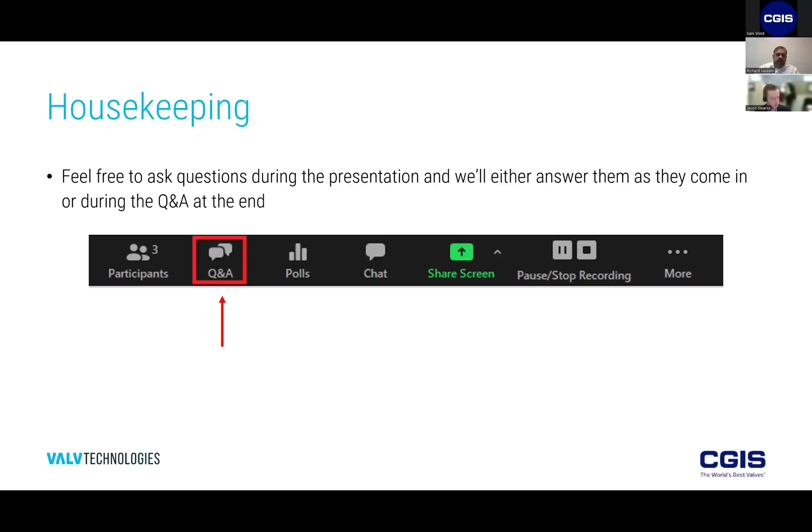So quickly as well, I just want to talk a little bit about CGIS, who we are, and our relationship with ValvTechnologies. Some of you may have worked with us in the past with other webinars and so forth. But just quickly with the background of CGIS, we're a valve automation company, and we really look at solving valve problems.

We do that by approaching the application. So we take an application-based approach and look at what the process conditions for that application are, what the valve's job is. Is it isolating or is it controlling? And how well does it need to do that job? Through partnering with companies and manufacturers like ValvTechnologies, who we've been working with 25 plus years, we're able to come up with solutions that solve the problem the first time and give you the performance, service life, and cost of ownership that you expect out of your valves. And we are happy to do that all day, every day.

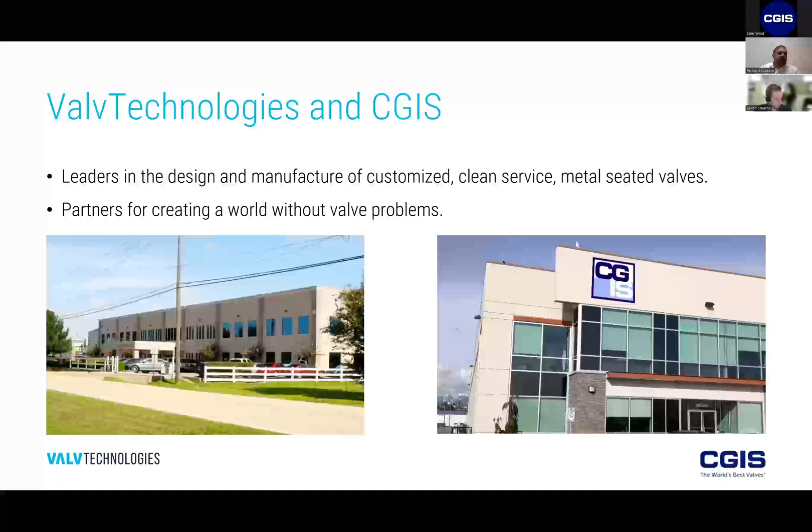So the whole series is about hydrogen as a fuel for the future. And the way that we're going to do this webinar is we're going to talk a little bit about the general principles surrounding hydrogen, and then we'll look at valve design in the second half of the webinar.

But the first place to start is actually our own sun. Our sun is mostly hydrogen, about 90% and certainly over. There's two reactions that occur, nuclear fusion and nuclear fission. The sun actually operates by fusion. So we're basically taking hydrogen and turning it into helium, fusing the two aspects of hydrogen, and then we actually get energy as a consequence out of that.

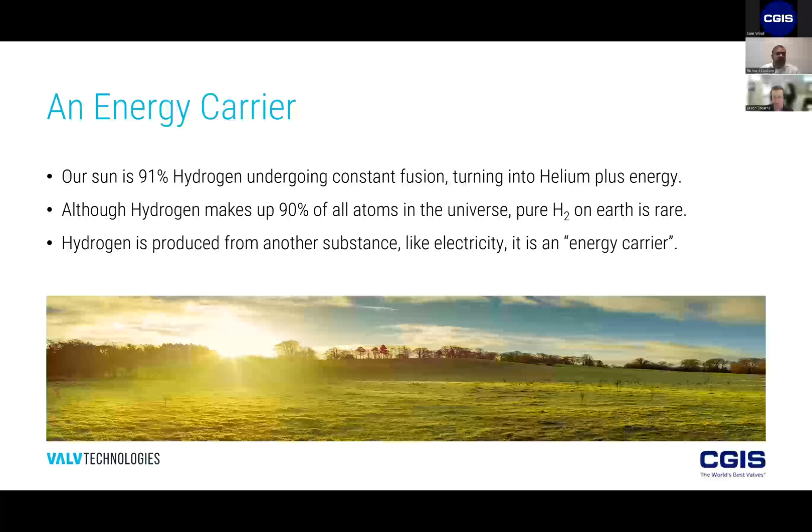Hydrogen makes up roughly 90% of all the elements or atoms in the universe. So at first you might think it is relatively abundant. In reality, on Earth, it's actually pretty rare to find. So the only way that we can produce hydrogen is we have to find it from another substance. Just like electricity, we see it as an energy carrier, and we'll go through some of the hydrogen production methods to actually get us there.

When we look at all the topics around decarbonization and we think about why hydrogen, when there are other ways in which this could be accomplished.

If we take the United States, for example, around 5% of the landmass would be covered with solar panels or wind turbines to generate all of the electricity that is consumed in the United States. So that 5% of landmass is infeasible to do. It would be a huge amount of cost, and lots of infrastructural developments would have to take place.

So although wind and solar will continue to be growing areas of renewable energy, we have to look at other methods as well. Hydrogen, as I said earlier, is relatively abundant in the universe, but on Earth it's relatively rare. So what we do is we produce it from a feedstock, and that feedstock is either a hydrocarbon, so hydrogen and carbon, or it could be just water itself.

If we do generate hydrogen from hydrocarbons, the downside of that is it creates carbon dioxide. And of course, with all the decarbonization efforts, it doesn't seem to make sense to have a clean fuel, but in a reforming process, we have this byproduct of carbon dioxide.

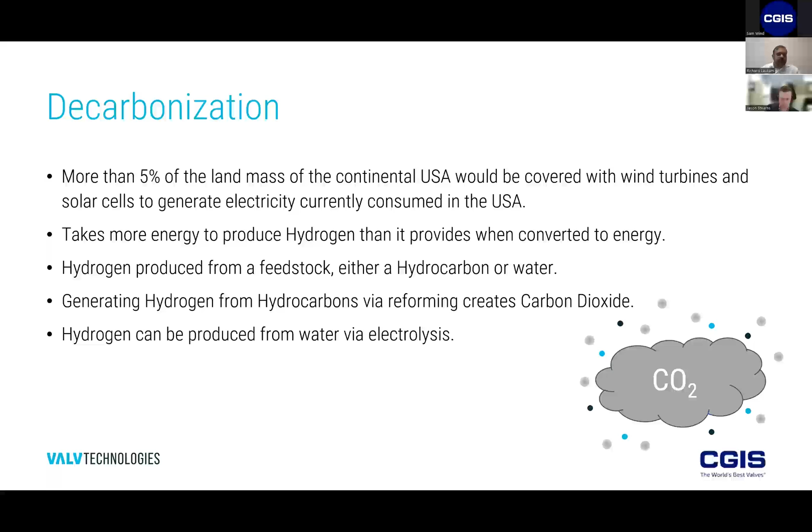So currently we're about 80 million metric tons per year, but we can see that rising to about 180 by the year 2030. So currently very little of it is for fuel, but the future potential for it being used as a fuel is still quite there.

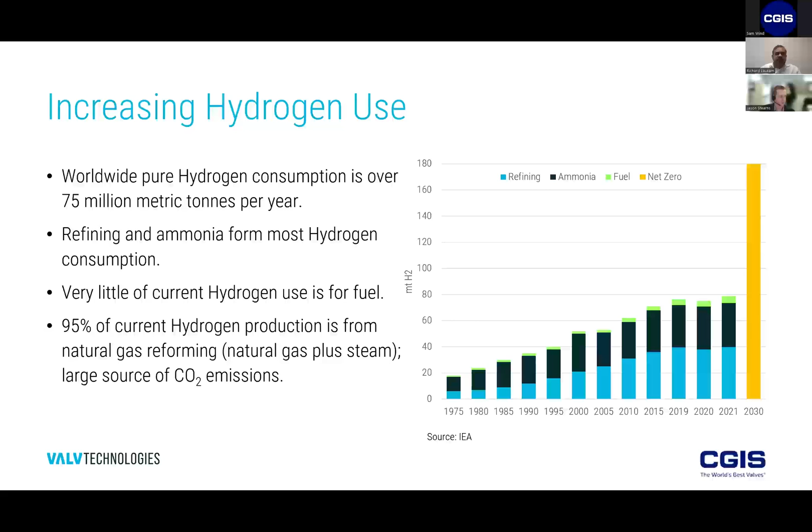So 95% of all the current hydrogen production is from reforming. And as I mentioned, that is a large source of carbon dioxide. That's where we take natural gas and we add steam to it. So the three production methods: we'll take something like methane gas, add steam to it, so water at high temperatures. It produces carbon dioxide and hydrogen, and of course there's the carbon dioxide byproduct.

The other way to produce hydrogen is through partial oxidation. So we take a fuel, again, such as methane, we add oxygen, and the byproducts of that will be carbon monoxide, which of course is dangerous, and also hydrogen.

But electrolysis is seen as one of the key areas of growth, and that's where we add electricity to water, and the byproducts there would be hydrogen gas and also oxygen gas.

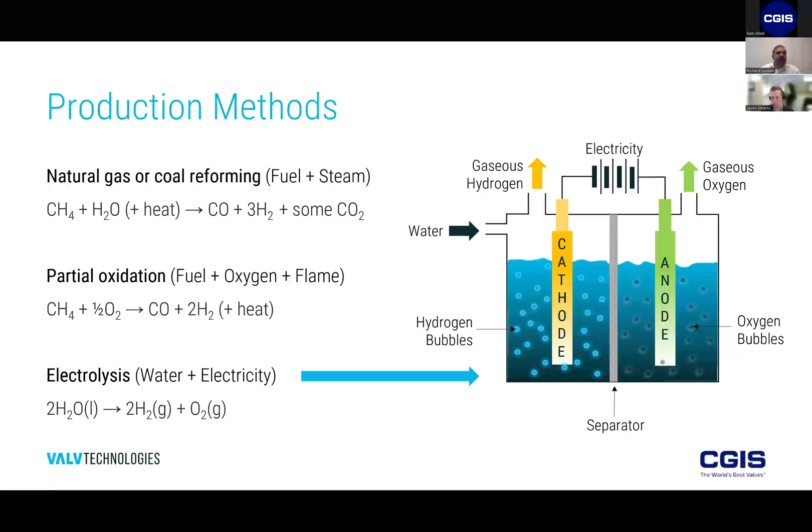So when we say electrolysis, think of it as a big tank. There's a separator in the middle. On one side, we have a cathode, and on the other side, we have an anode. And across the cathode and the anode rods, we apply electricity. Once we do that, on one side we will get hydrogen bubbles, and they escape through the top. On the other side, we get oxygen bubbles, and they also escape in the gaseous form. So really, electrolysis is all about adding electricity to water, and we can produce hydrogen from that.

You may have heard that there's different types of hydrogen, and if we go through the spectrum, if anything is referred to as blue or gray, it does mean that we're using natural gas, such as methane, to do steam reforming. The difference there is that there could be carbon capture or without. If we look at black hydrogen, that means it was produced from coal, so again the carbon intensity there is quite high, and typically there's no carbon capture. The same thing also applies to lignite coal, which is referred to as brown hydrogen.

If we're looking at renewable power, that would be green. Nuclear, it would be pink. And solar, unsurprisingly, is yellow hydrogen. If there's pyrolysis involved, that'd be turquoise. And if it's just naturally occurring hydrogen, as you'd find underground, then that's known as white hydrogen. So the different colors really refer to the production methods as to how we obtain that hydrogen, and also the intensity of the carbon as well.

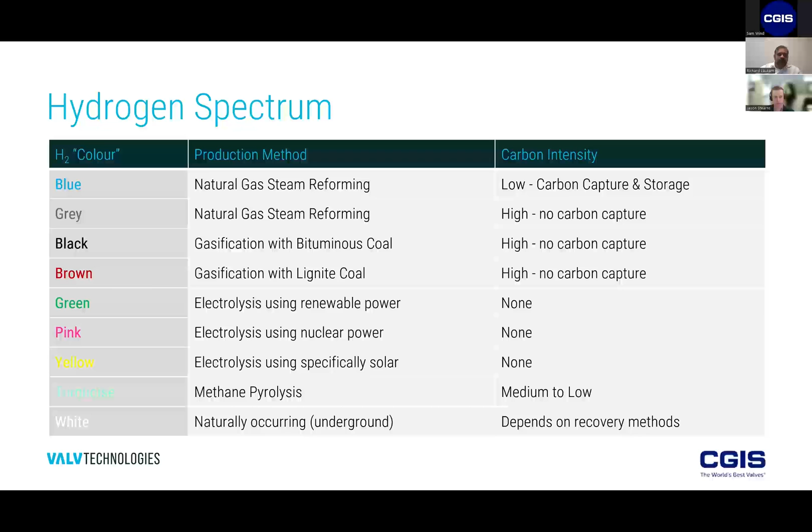If we look at the general properties of hydrogen, perhaps the first thing that stands out is it's highly flammable. Whenever we have a reaction, it's exothermic, meaning it releases heat. The heat of combustion rate is about 320 BTUs per cubic foot, which is relatively high. It auto-ignites at around 500 Celsius, and the lower to upper explosive limit in air can be between 4 and 74%. Whenever it does ignite, the flame propagation speed is around 15 inches per second.

So really what we're saying here is that hydrogen can be dangerous to operate, and factors such as leakage are critical. We've got to make sure there's no chance of hydrogen escaping to the atmosphere, but more importantly, that it doesn't ignite and create a flame, which could be dangerous to people.

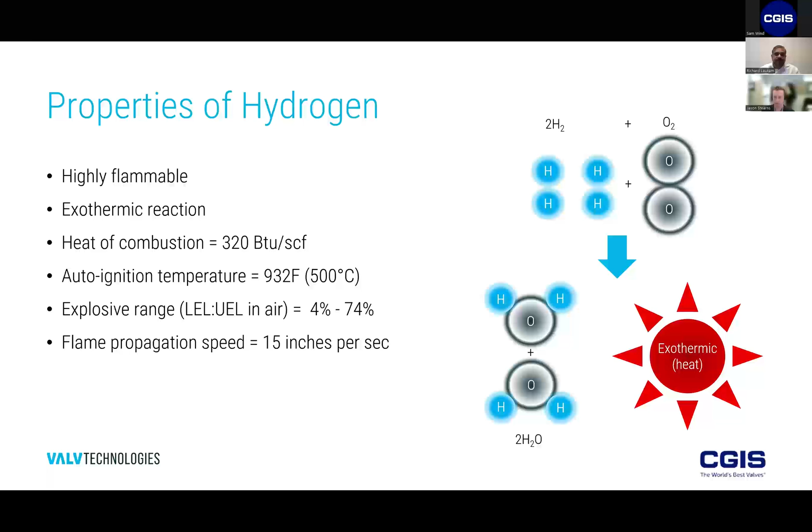If we look at the hydrogen universe, the world is going to increase its consumption of hydrogen to help our decarbonization efforts. There are very specific ways to produce it to make it viable. The question now is, when it comes to valve design, can we just take an out-of-the-box design and put hydrogen through it?

Actually, the answer is no, it's not even possible, because what would happen is we'll see hydrogen escape. Even if we took a zero-leakage rated valve with very stringent factory acceptance criteria, above ANSI standards, perhaps even ISO standards, and it didn't leak, tested as zero leakage with standard test procedures typically involving air, which is mostly 78% nitrogen, or hydrostatic tests with water, zero leakage can be achieved.

However, if you test that same valve with hydrogen or helium - the reason we'd test with helium is if we look at the periodic table, hydrogen is number one, the first and smallest element, and helium is number two, but falls within the vertical column of inert gases. So helium has similar properties to hydrogen for testing a valve, and it's safer to test equipment with helium than hydrogen, yet these elements are about a quarter the size of water molecules. So how does this impact valve design?

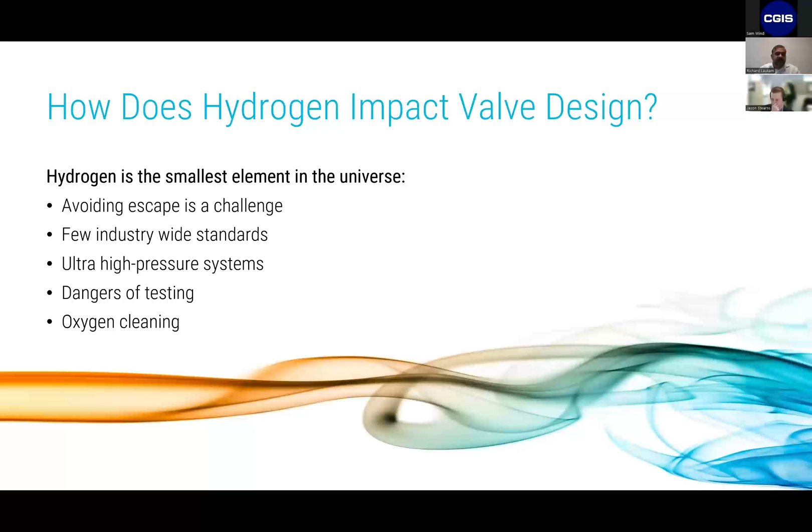The way coatings are applied, the term you may have heard is HVOF, high velocity oxygen fuel. We accelerate particles supersonically, they hit a substrate at a very high force, and that creates a bond. The higher that force is applied, the stronger that bond is. This technology was derived from the aerospace industry in the 60s and has now filtered its way down to valve design.

When it comes to coatings, which are really there as a hard-facing technique to prevent and resist wear over time as valves cycle, porosity becomes a design consideration. Whereas before, if a coating was perhaps 0.5% porous - one of the best on the market, since typically most coatings have 6% porosity - even 0.5% is not good enough, because hydrogen can still escape through that.

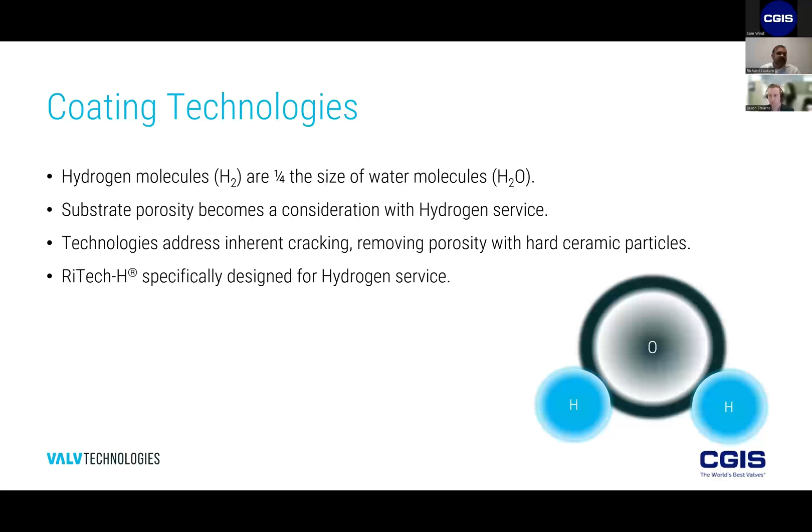That microcracking is critical for hydrogen service, but it's not when you have water, air, or even gas. So the coating technology is something that has to be changed or advanced.

The second thing too is when we look at the general designs of valves, they fall into a number of categories. There could be floating valves, seat-supported valves, or trunnion-supported valves, and each have their own advantages as well as disadvantages. But if you think about the general term floating valve when it comes to the geometry of the valve design, if the valve floats, so what we mean here is that the ball can float from left to right, assuming that the valve is in a horizontal position, then if the ball can float, then of course the valve is going to leak because that means that the ball is not in direct contact with the seat, and so escape can occur.

Trunnion-supported valves are a little different. So they have two floating seats. So we have a fixed trunnion protrusion at the top of the ball, a fixed trunnion protrusion at the bottom of the ball, and then we have a series of bearings to hold that ball in place. So even though the ball is fixed axially, the seats do float in and out. So technically, if you have seats that float, then hydrogen can escape from that.

And so one of the technologies that gets around this is an integral seat. So the seat itself is part of the end cap of the valve body. And so it's one contiguous component. By avoiding any welded in or pressed in seats and having that one contiguous component, it means there's no leak paths behind the seat. And that's one area where gases can escape.

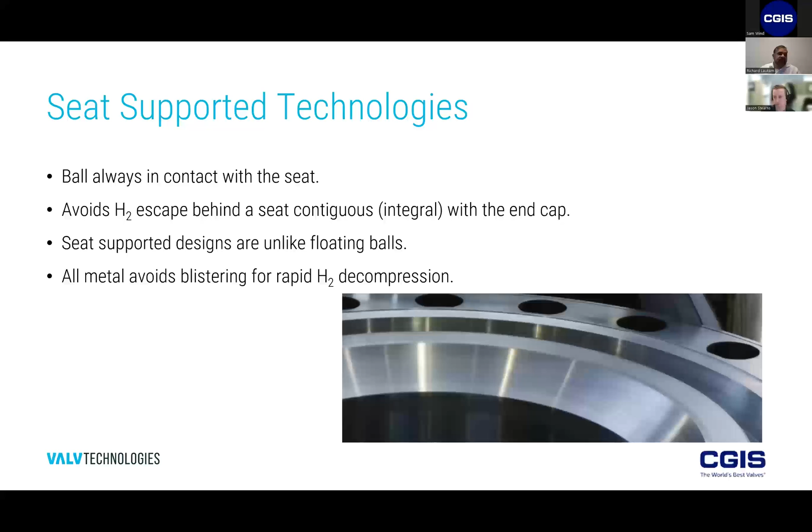And so that's why a metal seated design, although metal seated designs are typically associated with higher temperatures, and most hydrogen applications are pretty much at ambient, not very high temperatures, but the metal seated design is really intended for the avoidance of rubber components on there if there was to be a decompression event that would occur.

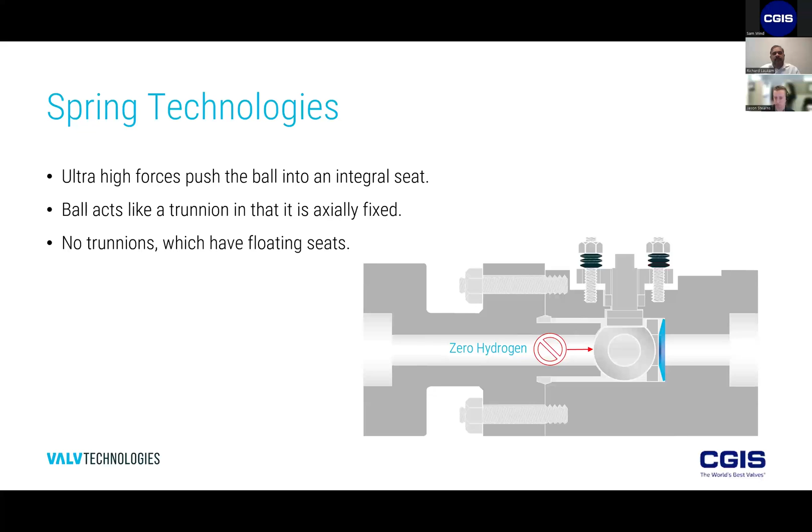The design consequence of this, the downside, is you end up with a high torque valve. And it's just pure physics. So when it comes to hydrogen service, one of the downsides of this is we see valves with extremely long levers on there, or perhaps bigger actuators than you would have normally. But that is the side effect of operating equipment such as valves in such an application. So the spring technology becomes pretty important here.

Materials of construction are also important. So whereas you have water, steam, or gas applications, those materials are generally suited to that application. If it's a very sour application, highly corrosive, then we make sure that there's the right high-performing alloys. But in actual fact, certain high-performing alloys may not be the right thing to use with hydrogen. So if we think about alloys such as Inconel, one of the engineers' favorite choices, it may not be applicable to hydrogen because we're concerned about embrittlement.

So really what happens here is that hydrogen diffuses in that substrate. It forms bubbles at the grain boundaries, and that pressure exerts intergranular cracking. And ultimately, the material loses its ductility and its tensile strength over time. So embrittlement is a concern, which is why certain materials, such as the Belleville spring, have to use different types of materials going forward.

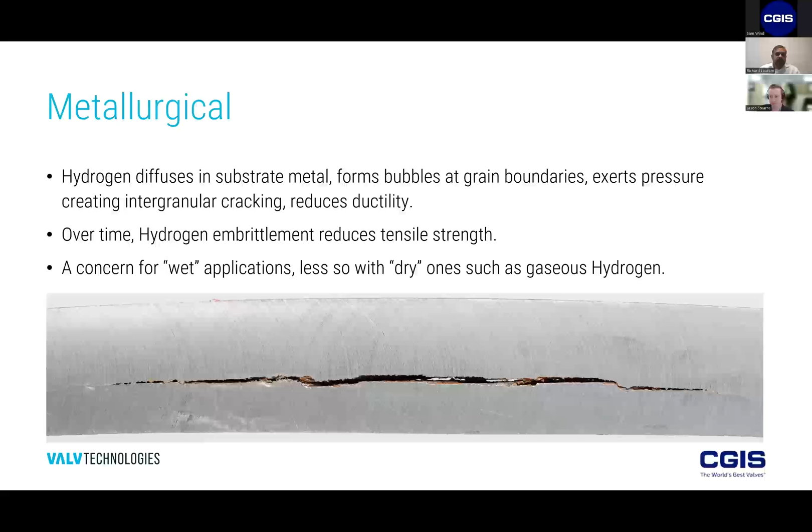Awesome. So fugitive emissions, I guess one of the questions was leading this way. So all live loaded designs, that's always a recommended practice, so you have that constant force applied. Like I said, typically a graphite with a 316 stainless mesh is the way to go. Elastomers or plastics are not recommended. But the stereotypical packing that you can get off the shelf may not be enough.

As of today, there are no standards. We do have engineers who are working on what was known as the API 6Z task group force, and that is to address what emissions should be for hydrogen service. So we probably won't see that standard until maybe 2025 at the very earliest. So there's really nothing available today to go to.

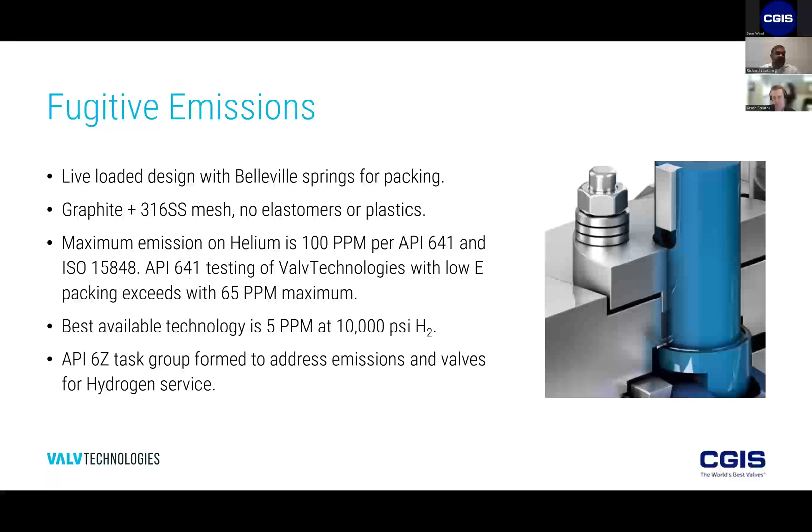But as I mentioned in one of the earlier questions, there is packing that has been specifically developed for hydrogen service, but it's not truly zero leakage. It's about 5 parts per million worth of leakage. And that's actually at 10,000 psi of hydrogen, which is a fair reflection of how these systems are likely to operate under high pressure.

There is one standard. It's the ISO 19880-3. It is a British standard. It talks about gaseous hydrogen, but really it is aimed towards fueling stations. It's one of the first, so it's a good document to go through. It's just over 60 pages. And the way that it's split up is it talks about the different types of valves.

So whether it's a check valve, a gate valve, a globe valve, or a ball valve, there's certain aspects that are relevant there. But having read through the document, I would say in general, it's a good start because we're really talking about specifically high pressure applications. Some of the requirements that it lays down is the 102,000 cycles.

So basically, 100,000 cycles under ambient, and then an additional 1,000 cycles at minus 40 Celsius, so a cold test, and then an additional 1,000 cycles at 85 Celsius, which to a metal seated valve is really nothing. 85 Celsius is really not that hot. But the intent here is that if a valve can pass these tests, then there should be no materials that result in any blistering. So again, it goes against rubber components that could be in there.

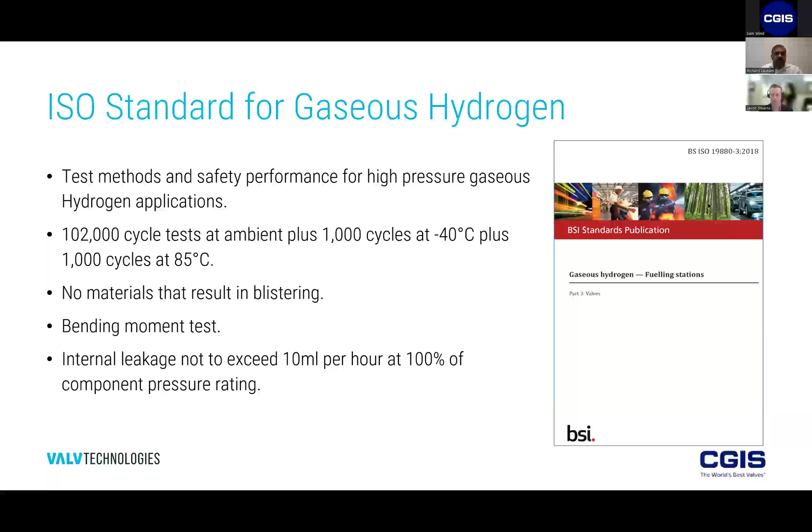But Richard, we have a question along materials selection. So I'll read the question here. Can we use duplex stainless steel for high pressure hydrogen service applications? Yeah, I would think so. I think any type of stainless steel should be fine. I haven't seen duplex just yet. I would say the most common material that has been chosen is pretty much 316, whether it's the low carbon version or standard. Typically 316 is what we see. Thank you.

So this is one way to test valves, and that is to have a hydrostatic shell test that's done at 150% of the cold working pressure, and the time is set to 3 minutes, which is greater than any of the standards. And the acceptance criteria there would be zero drops per minute. The other way to do it is to do a seat test, so you're testing the integrity of how well the seat works. This can be done again at 110% of the cold working pressure. The time could be higher than all of the standards, and the test criteria could be zero. And a low pressure helium test can be done.

A low pressure test might initially seem counterintuitive, but it's actually harder for a valve to pass a low pressure test than a high pressure test. The reason is the valve could be relying on the upstream pressure in order for it to seal. So by asking the manufacturer to do a low pressure test with helium, because it's safer than hydrogen and the molecules are almost as small, it's much harder for any valve design to pass a 50 psi helium test than one at a much higher pressure.

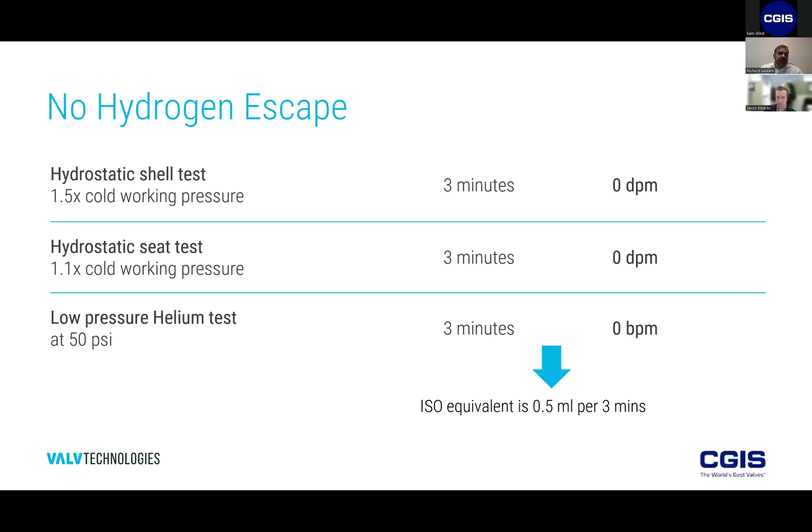But again, if we compare this with the ISO equivalent, it was roughly half a milliliter for that same 3 minutes of duration. So the point here is that if the factory has more stringent standards, the likelihood that hydrogen escape is going to happen actually decreases significantly. So the testing becomes quite important.

So just to come to the conclusion, if we look at the advancements we've seen in the design of valves specifically for hydrogen, it really boils down to a couple of things. One is the coating technology. We talked about porosity and how to avoid that porosity. We talked about different geometries in a ball valve. Whether it's a floating design or a trunnion design, the seat supported design is perhaps the optimal of the three geometries to assure that there's no leakage.

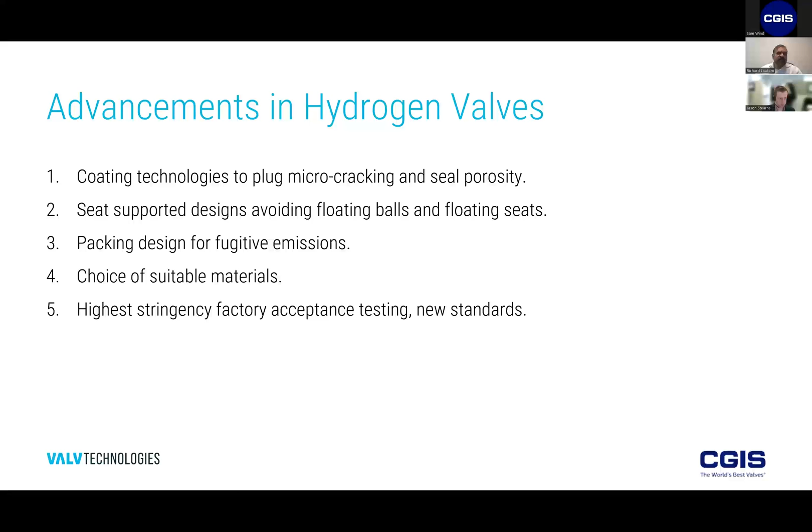We talked about the packing, which again, we can't just rely on standard packing. It's got to be designed specifically for hydrogen service. We talked about the general choice of materials, typically stainless steels. And we're looking at higher and higher stringency in factory acceptance testing, because as of today, the standards are really inadequate. The higher the factory acceptance testing, the greater the chances that valve is the right valve for hydrogen applications. So that's the summary of the webinar.

This application is a dual one, primarily used as a truck fueling station. This particular company has a fleet of long distance trucks that they wish to decarbonize, and hydrogen is being used as the primary fuel for these trucks. But there's not enough hydrogen stations built yet, the infrastructure really isn't there. So what this company did is they built an electrolyzer.

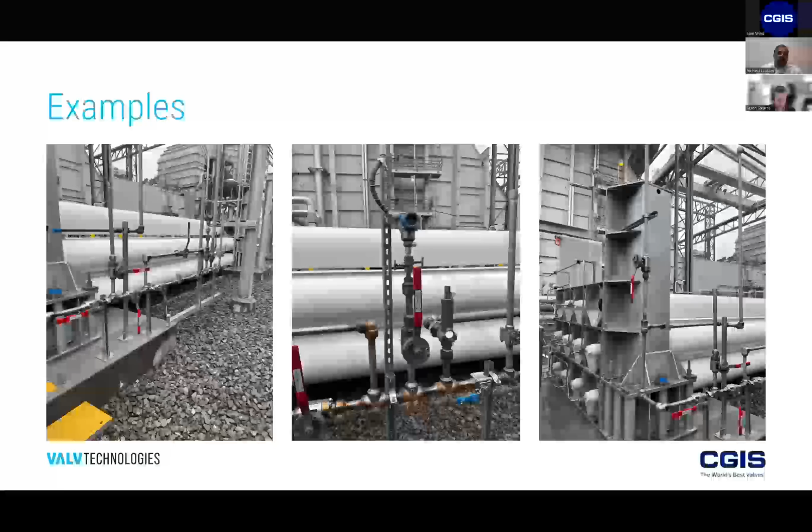Electrolysis is the process in which they produce hydrogen from water. Once the hydrogen is produced, in this system, some of it is used for truck refueling, and some is fed into a gas turbine. This is actually physically at a power station in California, where the hydrogen is blended with natural gas and burned to produce steam and electricity by conventional means.

The reason why ultra pure hydrogen is injected into the system is, if you've ever seen a hydrogen flame and compared it to a candle, in a candle you see lots of smoke coming out the top. But if you burn hydrogen that way, it's a very pure, clean flame with no smoke.

So the turbine isn't 100% hydrogen, but by injecting hydrogen into it, we still have the energy required to produce electricity, but more of it is being burnt without carbon dioxide or carbon emissions as a side consequence. So the whole system becomes cleaner and helps everybody with decarbonization efforts.

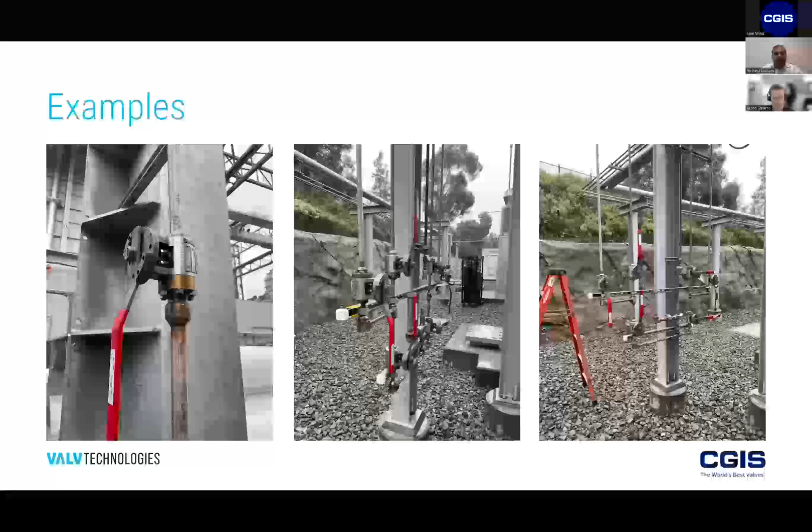That's one example, and there have been others. I talked about ammonia at the start when we looked at the graph, so fertilizer production means there are hydrogen systems there. We also see hydrogen compressor applications at refineries. And of course the big one is hydrogen as the way of the future for fueling up. All these hydrogen systems are being developed.

That's pretty much the end of the webinar, and we'll open the floor to additional questions. But really, just want to leave this in everybody's mind: when it comes to the adoption of hydrogen, and specifically the systems around it, whether it's valves, pipes, or fittings, this is likely to be a marathon, not a sprint.

I think getting all vendors, manufacturers, and EPCs aligned on the same page is going to take quite some effort. It seems like we're heading this direction, but it's not going to happen overnight. It will take a number of years to refine the standards and make things a bit more common across the board.

But here at ValvTechnologies, it's worth saying we came up with this technology a little bit by accident, it wasn't really by design. About 12 years ago, a semiconductor company approached us wanting valves that were zero leakage in helium. Back then we took the order and didn't understand the consequences of testing an out-of-the-box valve with just helium, and valves that were supposed to be zero leakage actually ended up leaking.

So it was an R&D project we did to solve a specific problem. We didn't know about the future for hydrogen back then, 12 years ago it was relatively benign. But because of that relationship in semiconductor manufacturing, we developed the technology and were able to guarantee that ValvTechnologies could build, test, and assemble a valve that was truly zero leakage with hydrogen, ultra high pressure hydrogen. So it's interesting that we came into this by solving a problem, developing the technology 12 years ago without realizing we were very much ahead of the curve.